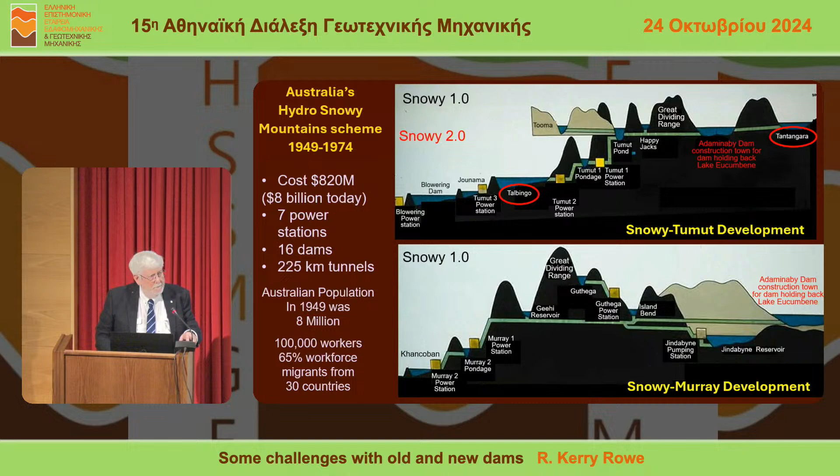A lot from Greece, from Italy, from Germany, from the countries that had just been occupied by Russia to become part of the USSR, and from the UK. I'm going to end the talk with Snowy 2, which involves these 2 dams.

Now, why is this particularly important to me? Because I grew up in the 1950s at the construction town where they were building Adaminaby Dam. I lived in this house. There's a picture of me when I'm about 5, a little older there. And as I said, I wanted to build dams from the first time I saw them being constructed.

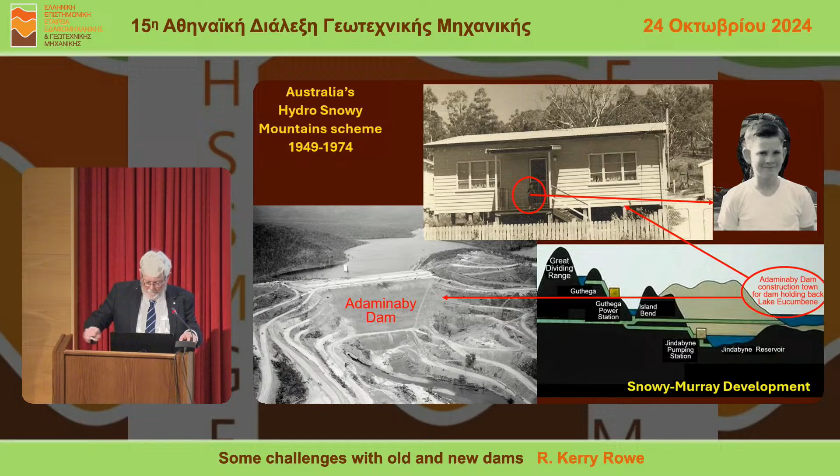So if you want to build dams, you become a civil engineer. So I studied civil engineering at the University of Sydney. I graduated in 1974, and guess what? The Snowy Scheme finished, and nobody wanted to build dams.

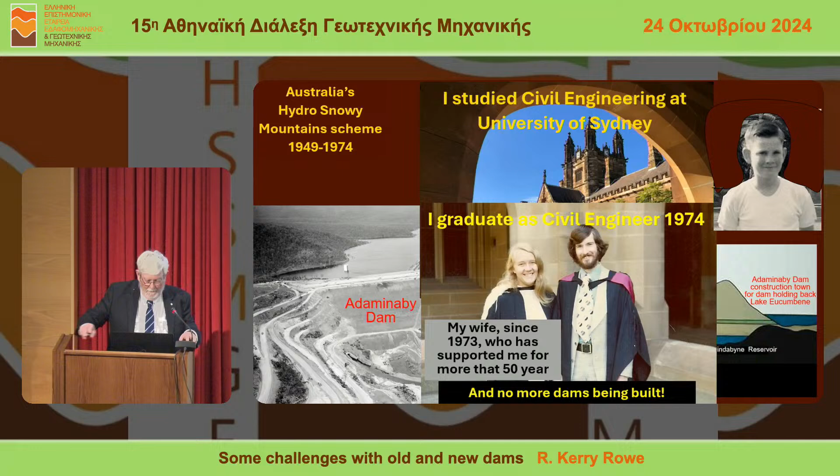Harry Poulos, who many of you will know, was my undergraduate thesis supervisor, and he persuaded me to do a PhD. And I studied many things in my PhD. I looked at soil structure interaction, anchors, piles and slopes. And in parallel, because I was working at the time, I worked on pile-socketed rock behaviour, driving piles into soft rock, rock mass modulus of weathered and jointed rock.

Then I moved to Canada and started working on tunnels and geotextile reinforcement. And you probably look at that list as I would have 30 years ago and said, what's the relevance to tunnelling? Well, I eventually found they're all relevant to tunnelling. And I'll show you a little bit of that.

50% of my work since 1980 has been containing fluids, with natural materials, with geosynthetic materials. And they can play a very important role.

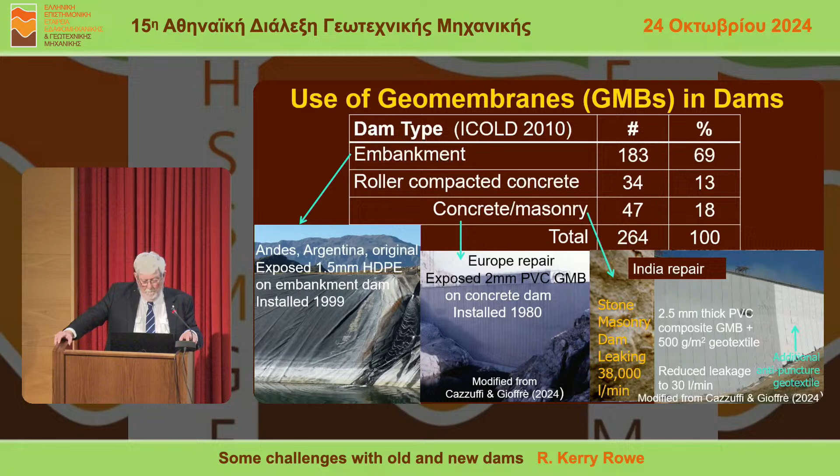They can be used in dams. A very dated ICOLD survey from 2010 listed 264 dams where they were used, the majority embankment dams, such as you see on the left. But geosynthetics are also extensively used in the rehabilitation of dams, such as the concrete dam you see in the middle and the masonry dam on the right.

Many different polymers have been used, but predominantly PVC, polyethylene, and bituminous. They can be left exposed or covered. The oldest exposed geomembrane is 50 years old, and the oldest covered is 64 years. So they do last.

So tonight, I'm going to talk about old and new dams, rehabilitation, and some of the roles geosynthetics can play. But we need to start with a little reflection on climate change, because it has a critical role to play in modern engineering of dams.

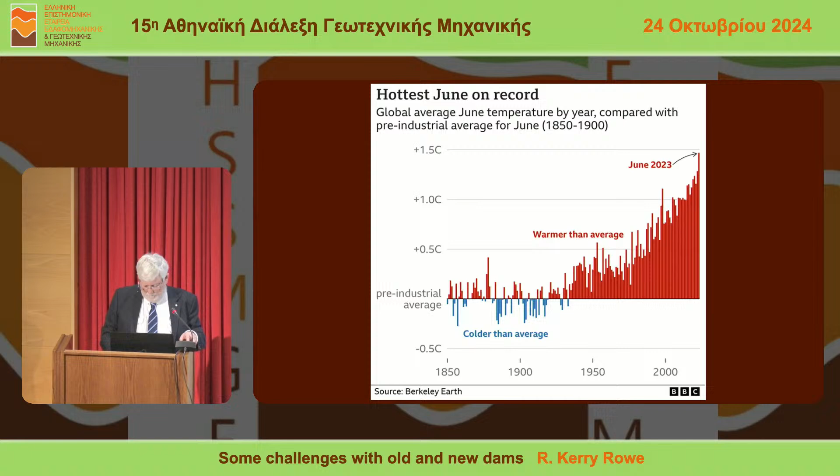I hope I don't have to convince you that climate change is real. Temperatures, on average, keep going up, and nowhere are they going up faster than in the Canadian Arctic. Inuvik is part of the land of the midnight sun, but it was at 33 degrees a summer ago. Norman Wells is in the Arctic, a lot of it on permafrost, and it was at 38 degrees last summer.

Now, why does that matter? Because what happens in the Arctic doesn't stay in the Arctic. All of that melting water has multiple effects, and one of the greatest effects is actually going to be on Western Europe.

Sea ice loss has many civil engineering implications. The rise in average temperature is what we talk about, but the really important thing is the increase in frequency of extreme events. Flooding of coastal communities is one example — it's only a couple of years ago that New York was flooded. Permafrost loss has a number of critical implications, not just for Canada and Russia where it's occurring, but for the rest of the world because of the methane that comes from that permafrost.

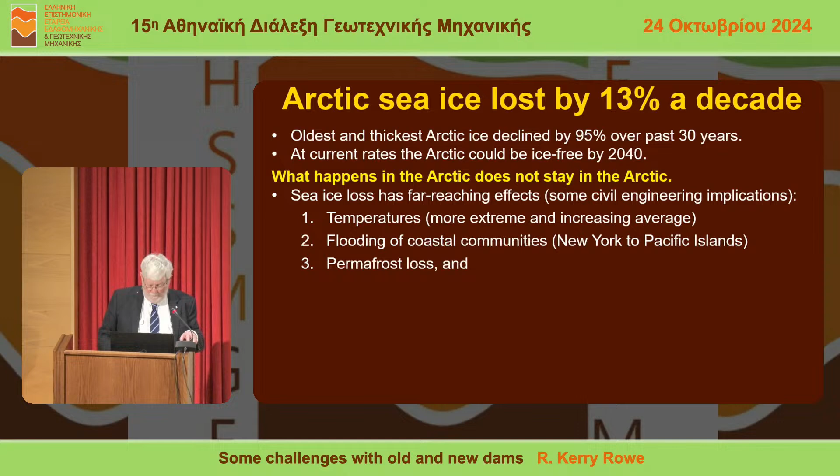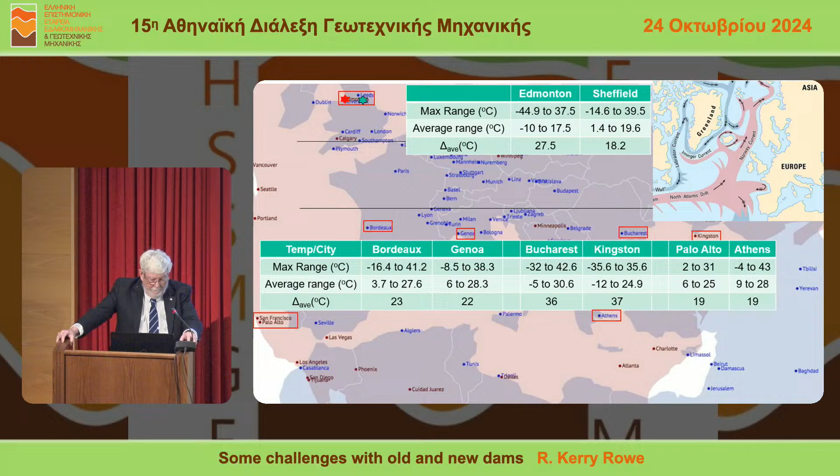Now, why does this matter? Because the melting of Arctic ice is slowing down the Gulf Stream, and it is now the slowest it's been in 1,600 years. The analysis is suggesting it's going to shut down — the only thing that's not known is whether it's in 1 or 2 decades or 1 or 2 centuries. Time will tell.

But climate change is not something to worry about in the future. It's here. March 2024 was the warmest March in 175-year history, and the 10th consecutive month of record high global temperatures.

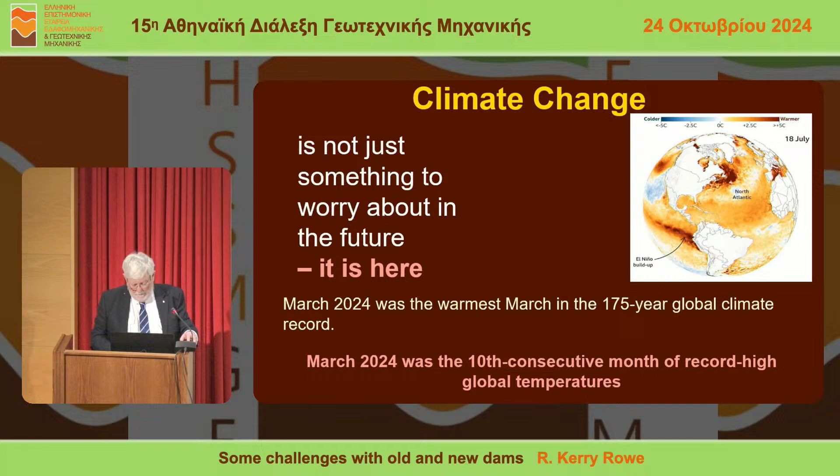And what are the implications? Well, I'm sure you're aware, because we'll get to Greece in a moment, of the storm that caused the failure of Libyan dams, with thousands of losses of life and tens of thousands of people displaced. People say, well, it's all because they didn't maintain their dams. That may be a factor, but lots of parts of the world are not maintaining their dams, not just Libya. And look at the destruction that it wreaked.

Now we come to Greece. As you are only too well aware, a couple of weeks later, you had major flooding effects. And in the context of dams, what we're worried about in particular is how these floods will affect dams, because if they fail, the consequences are, as you saw in Libya, huge.

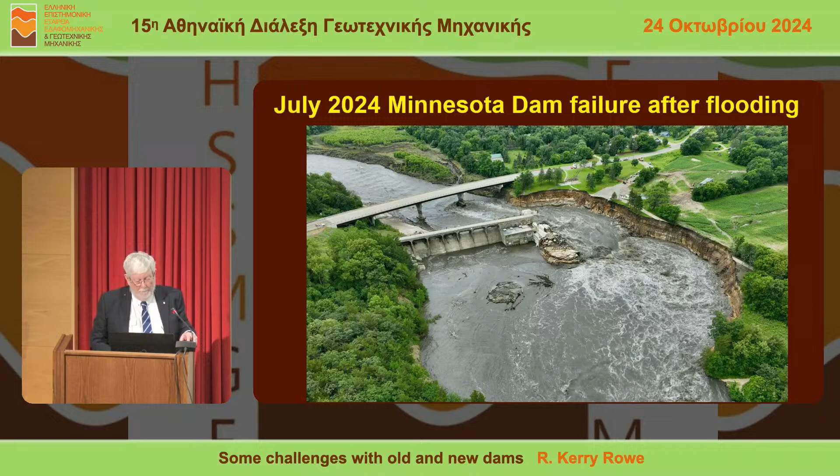So we need to mitigate the effects of climate change. The first step towards mitigation is anticipating what are the extreme storm events. The second step is identify locations of greatest risk of flood. And by risk, I mean probability and consequence.

Revise estimates of maximum probable floods. Reevaluate the safety of all dams in the context of the input design flood. And as needed, lower storage levels, raise dams, or increase emergency spillway capacity to accommodate the extra water that we now know is coming.

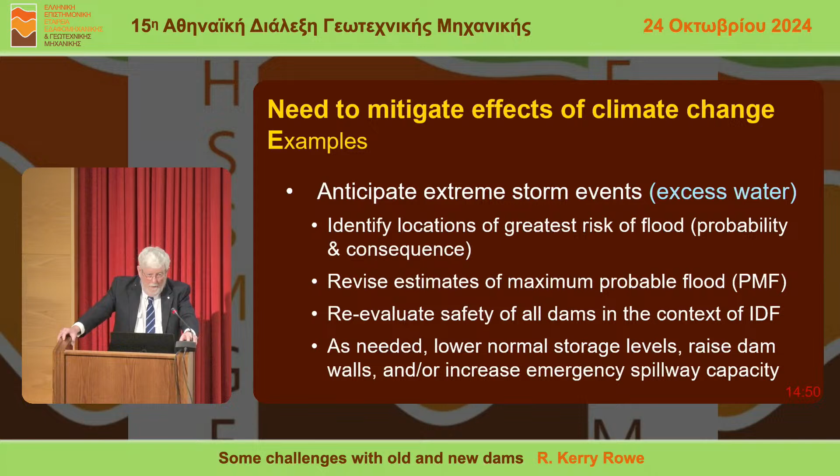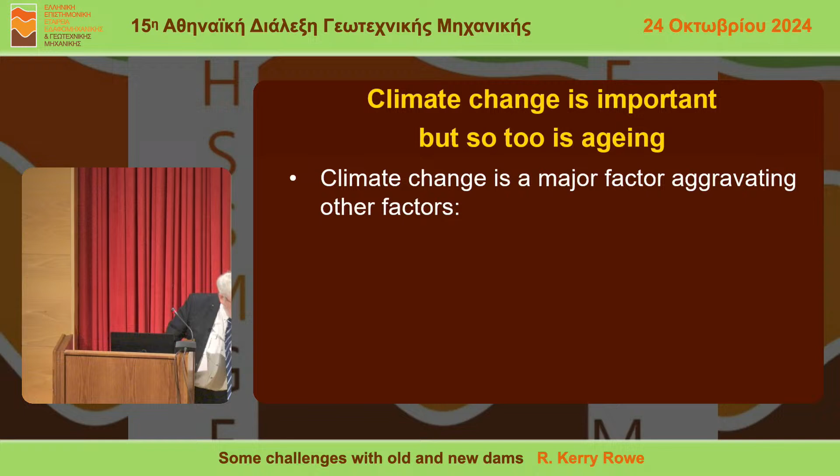So climate change is important, but it's only one of the factors that we need to consider. Other major factors are the aging of steel, the aging of concrete, alkali aggregate reaction, clogging of filters, erosion of sediment in cracks or fractures, and time-dependent loss of soil strength.

As I said, I'm a baby boomer. A huge amount of construction went on after World War II. And over the last 52 years, I'm not the only thing that's changed. Dams have been aging along with me, and that is becoming important. Just like humans, dams don't necessarily get better with aging. So we're going to now talk about rehabilitation, and then we'll talk about some new dams.

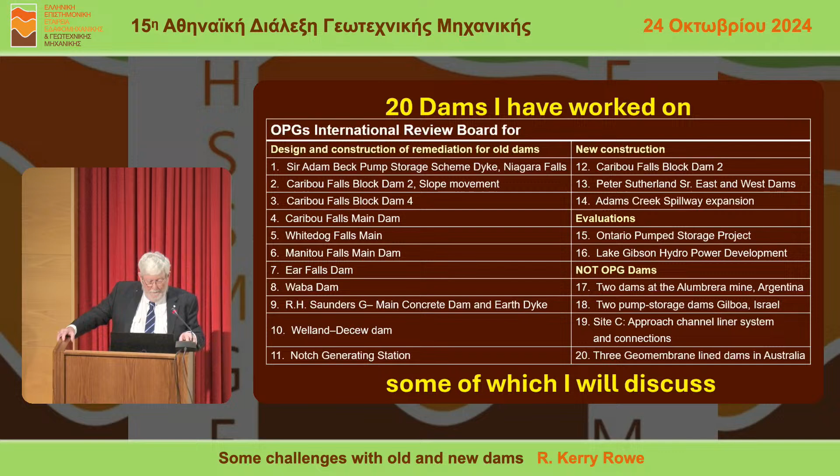Over the last 20 years, I've had the pleasure and privilege of working on 20 different dams, some of which I will discuss tonight. Now, the dams I'll be discussing in detail are predominantly from Ontario, and one I'll discuss in a lot of detail is from British Columbia. So I must thank Ontario Power Generation and BC Hydro for permission to talk about these cases.

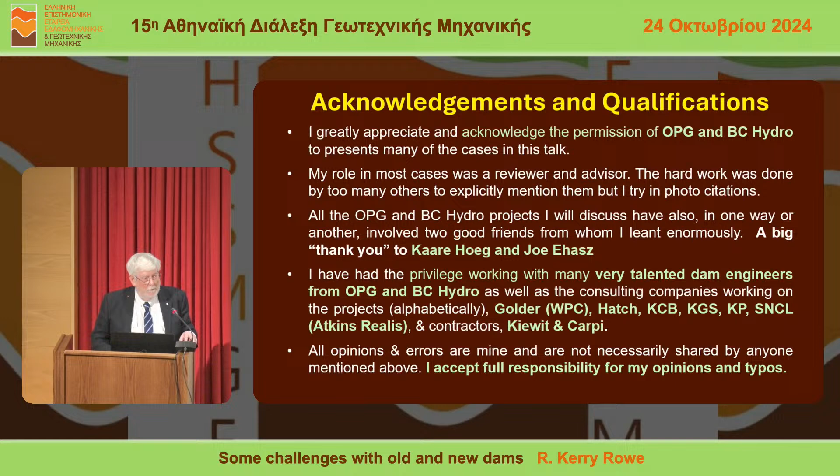My role has been as a reviewer and advisor. Other people are doing all the hard work. And for the last 15 years, I've had the great pleasure of working with two giants in dam engineering, Kaare Hoeg and Joe Ehasz, from whom I've learnt a great deal. And the privilege of working with many talented dam engineers with OPG, BC Hydro, and various consultants and a number of excellent contractors that I've had the privilege of working with. Having said all that, none of them are responsible for what I'm saying, except for me.

So Ontario Power Generation has 66 hydroelectric stations, 240 dams on 24 river systems, and generates 42% of Ontario's power from hydro, out of a total of about 18.2 gigawatts. BC Hydro has 31 hydro stations and generates 12.2 gigawatts. So clearly, dams are important for hydro.

Why else are they important? Well, water supply. Flood control is a major consideration. And when you build a nice reservoir, it's lovely to have it for recreation. These are all great motives for building it. But they also induce great challenges as we try to deal with climate change and the increased severity of storm events.

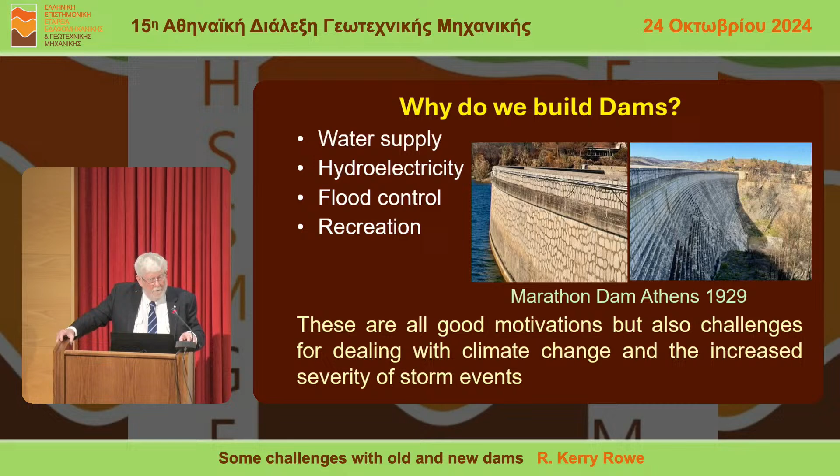So what can we do if the input design flood goes up because of extreme events? Well, we could reduce operating water levels, but as you can see, that has very significant implications. Rarely is that an option. We can increase the dam height. That also has social and political effects. We can increase spillway capacity. And now we have to think very carefully about what is the risk of flooding as we increase the amount of water in a storm.

So dams are a technical issue, but they're also political and social issues. And the engineer is often caught between the proverbial rock and hard place. But tonight, we're going to focus on the technical issues.

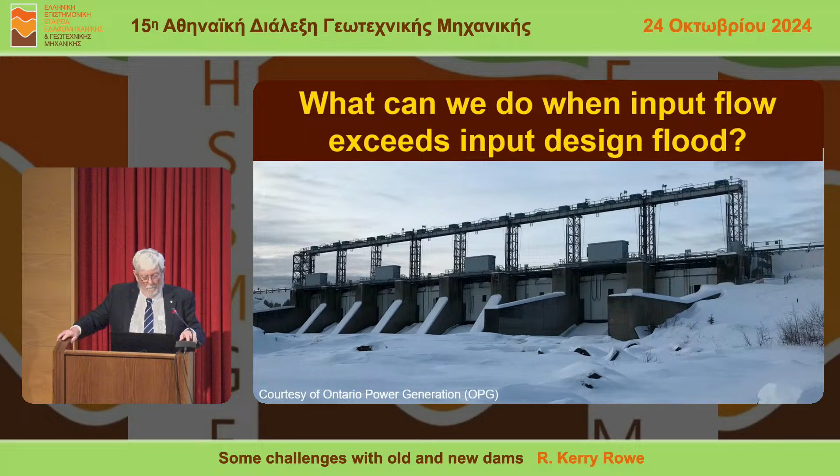So let's begin with the simplest case when you can do it, and that is increase spillway capacity. So, what can we do when the input flood here exceeds the input design flood? Increase the capacity, and in this case, the flood risks were low.

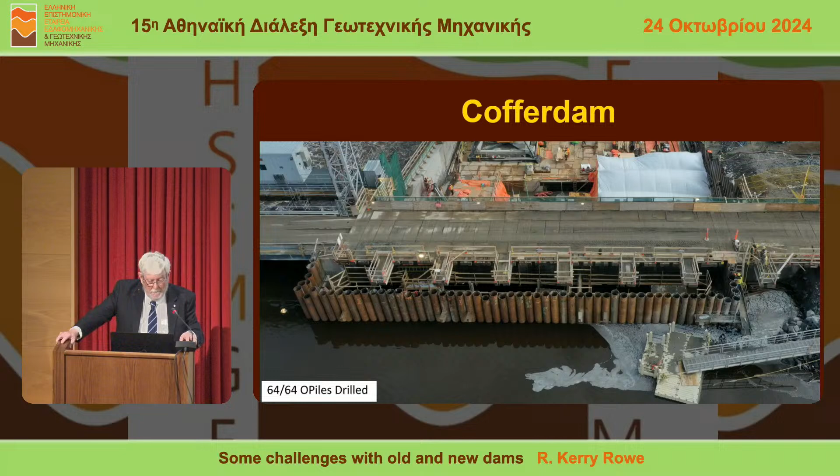So, the capacity is going to be essentially increased by more than 50% by adding 4 new gates. Now, a lot of that is structural work, not of particular interest to the geotechnical side of the profession on which I sit, but there are some very interesting geotechnical issues with respect to, firstly, the cofferdam, but especially the upstream dam wall that was required to get the extra spillway capacity, because it's quite a complicated flow problem.

So here you can see a cross-section along the path of the upstream wall, showing the overburden and the bedrock. And this is the layout of the wall. You can see the drilled piles or caissons and the sheet pile walling between them.

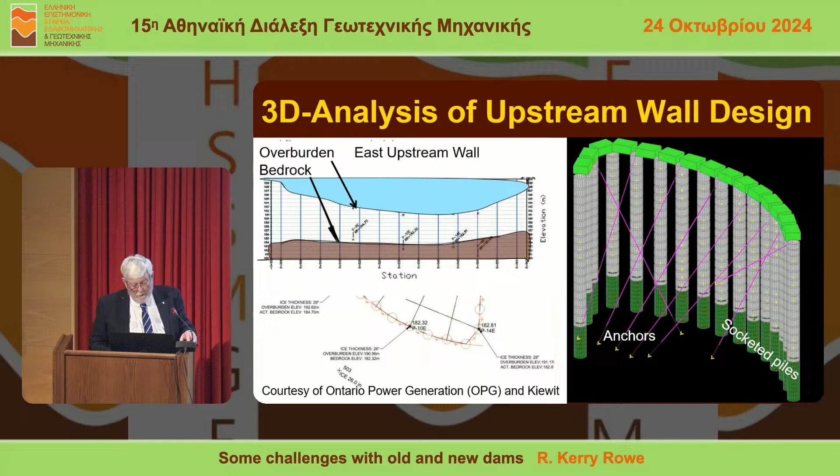And this is what it looks like as a schematic that was prepared as part of a detailed 3-dimensional stress analysis to ensure that the system would be safe. We have socketed piles, we have anchors, and we have an interesting construction process.

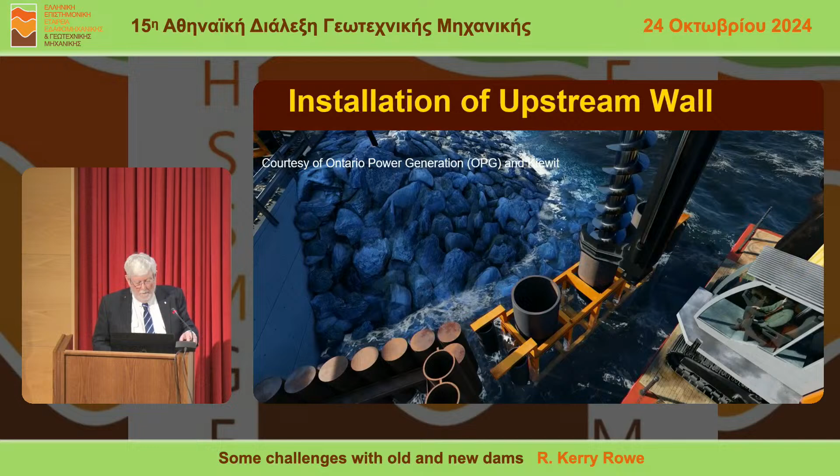So here is the clearing up of the riprap where we need to place the piles. There are the forms that make sure that the piles are positioned correctly, starting at the cofferdam. The process of drilling out the soil, drilling out the rock, taking it away on a barge, filling it with steel and then concrete as the wall develops.

And here we see it finished. A fascinating project. Let's move to another one.

This is more geotechnical. Accommodating 1.5 metres of crest settlement. So this is a dam built on highly sensitive clay. We call it Leda clay. It was built 60 years ago.

And the engineers who built it were very good. And they made predictions of the settlement, and they predicted by this time it would settle 1.5 metres. And it has. They're really good.

Two other things complicate life, though. The first is pore pressures. When you see 1.5 metres settlement, you know there's been pore pressure dissipation. But the excess pore pressures after 60 years are still 1 metre above the crest. That is because this clay collapses, it destructures, and it generates pore pressures as quickly as they dissipate.

The second thing that couldn't have been anticipated 60 years ago is climate change and the effect that has on the input design flood, plus run-up, plus set-up. So that the core in 2018 was just 0.9 metres below the current IDF plus run-up and set-up. So what do you do?

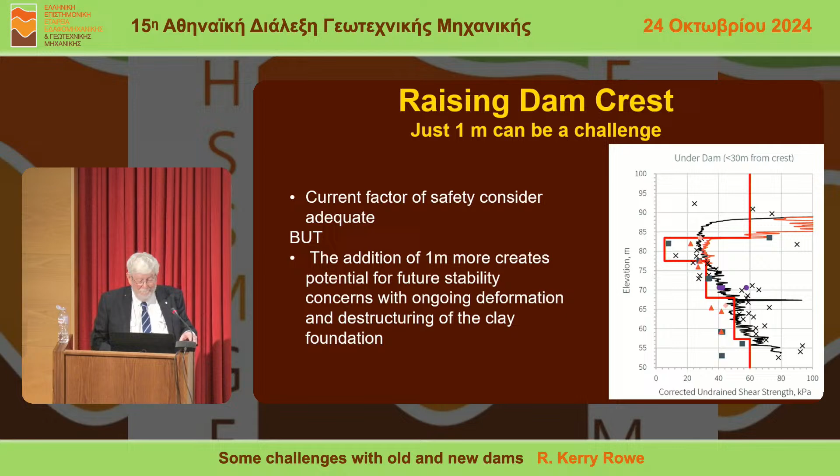And in fact, it is one that says, no more adding 1 metre. So what can we do? Well, in this case, it turned out to be a relatively simple solution that you can't always use, but was rather fortunate given the other challenges.

Because when you look at the 2018 IDF, it is about 0.74 metres below the crest. When you add the run-up, you are very close, as I pointed out, to the core crest. But with the Jersey barrier, one is able to accommodate just the current IDF run-up and set-up. So it deals with the wind and wave action.

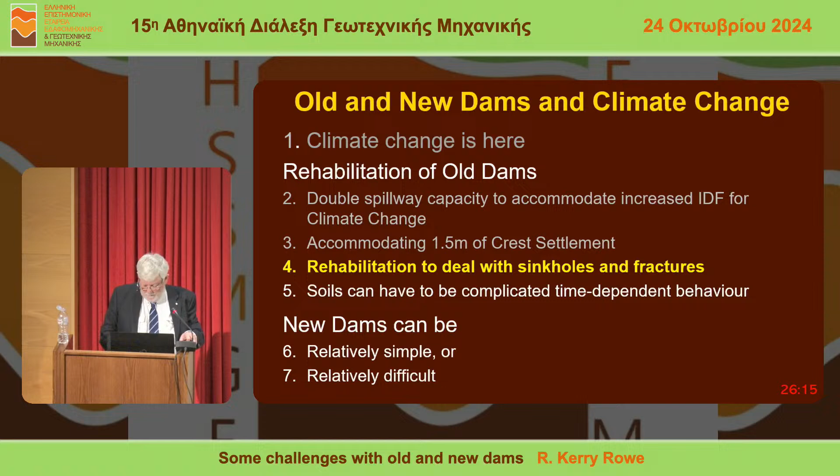So that is the next example that I have. The third example is rehabilitation of a dam built on limestone. And this is a particularly sensitive dam. It's the Sir Adam Beck Dam built in 1957.

It's on a mesa right next to Niagara Falls. And as you know, Niagara Falls lies between the United States and Canada. And this dam, as you can see in the diagram, has 2 generating stations and is located with a 20-metre high dam wall about 200 metres from the main crossing between Canada and the United States.

So if something happens to that dam, billions and billions of dollars of trade have been wiped away, not to mention the lives of people living downstream. So needless to say, OPG take it very seriously.

Now let's have a look at its size. It's 300 hectares inside the dike, a 7-kilometre long dike. It's a pumped storage scheme, the only one we have in Ontario, where you pump water in when you've got excess energy and you drain it out when you need that energy.

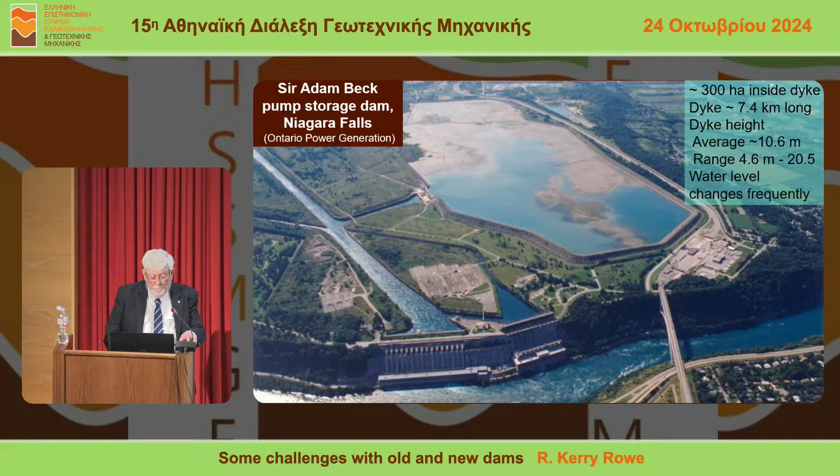And the water levels go up and down quite frequently. It has the advantage it's easy to drain. Now this is the dike. It's fairly traditional. We've got a base filter, sluiced rock fill, coarse filter, fine filter, compacted core, and then going out outer filters, rock fill and riprap. And everything was very nice for a short while.

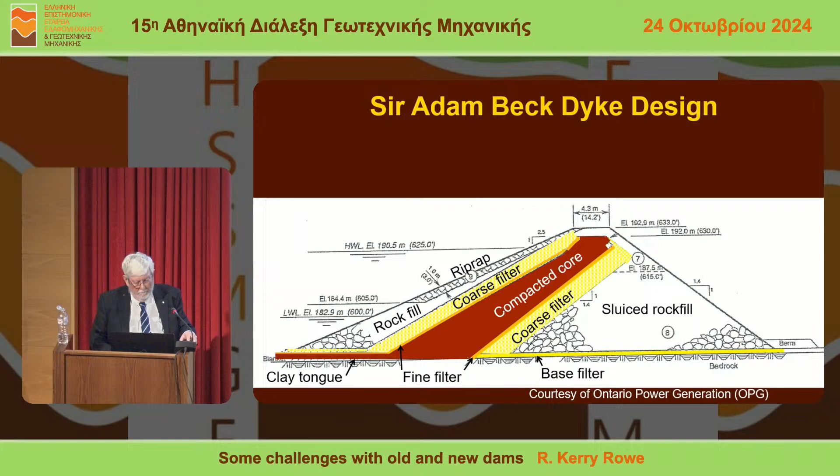It's on limestone, fractured limestone, high above the Niagara River. And one year after construction, there was a failure. Luckily, it was caught in time, not to be a severe failure, but nevertheless. Piping occurred through the overburden, through the fractures in the Lockport Formation, which is fractured limestone, and up into the zone outside the dam core. So this was fixed by grouting the affected area and by construction of a clay banking.

So it's 1958. I'm still at Adaminaby Dam, still going to middle school.

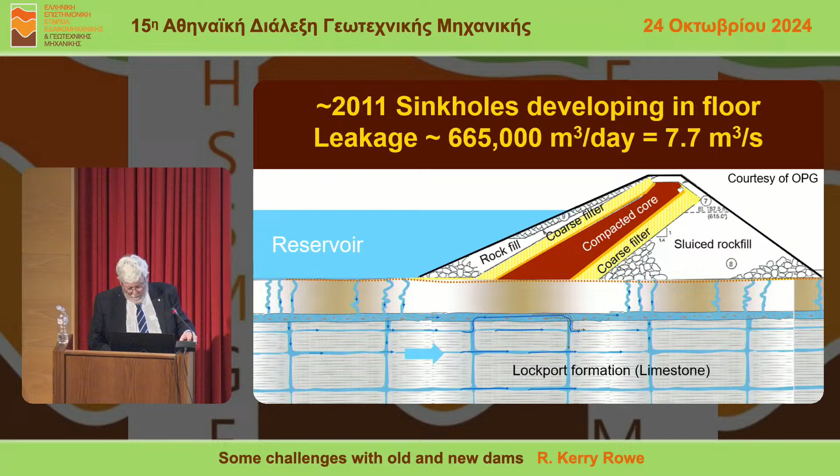Now we come to 2011, and we have sinkholes developing. Sinkholes, when you have limestone, is a warning sign. We have leakage of 665,000 cubic metres per day, or about 7.7 cubic metres per second. Because water is going down, it's migrating.

So how do we fix this? Well, the first thing we could do is do grouting. Done it before, do it again, but it has obviously imperfections. So the grout curtain went in, but also there was a big debate: do we need to line the entire facility or just a portion of it? Ultimately the decision was made to do a portion.

So we want to tie into the clay tongue, and we used geosynthetic clay liners to tie in to the clay, and HDPE as the lowest permeability component. A GCL is, for those not familiar with it, a layer of bentonite sandwiched between two geotextiles. Bentonite is a swelling clay and can have, under the right circumstances, very low hydraulic conductivity. And so we're going to use this to tie in to that clay tongue that you can see on the left-hand side of the figure.

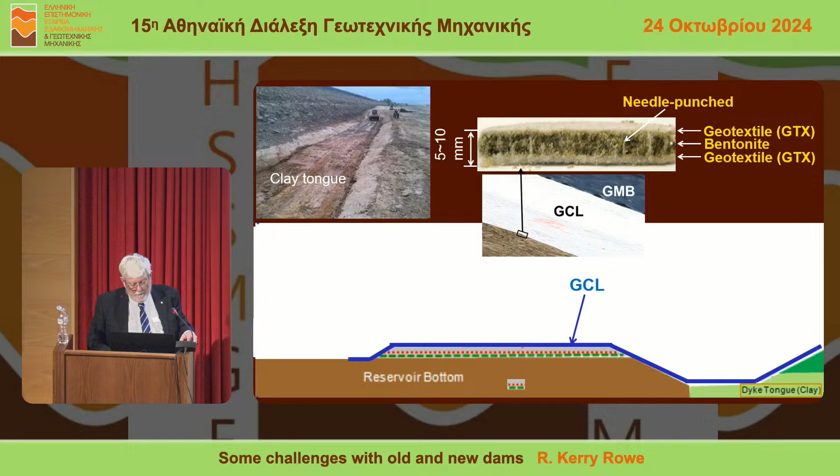And at the bottom of the figure, you can see the dike tongue coming out. You can see schematically we've excavated down to the dike tongue, and you can see it actually in the left-hand side of the figure. Then we place a GCL down, a geomembrane, another GCL, and gravel to bring it back up to an operating level.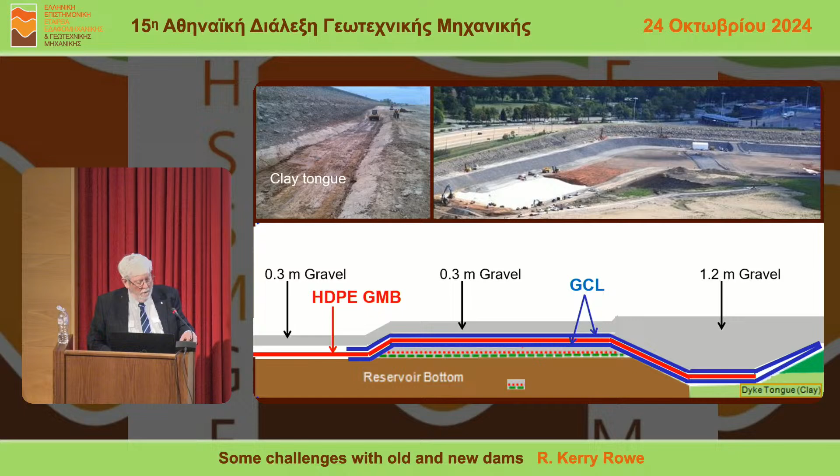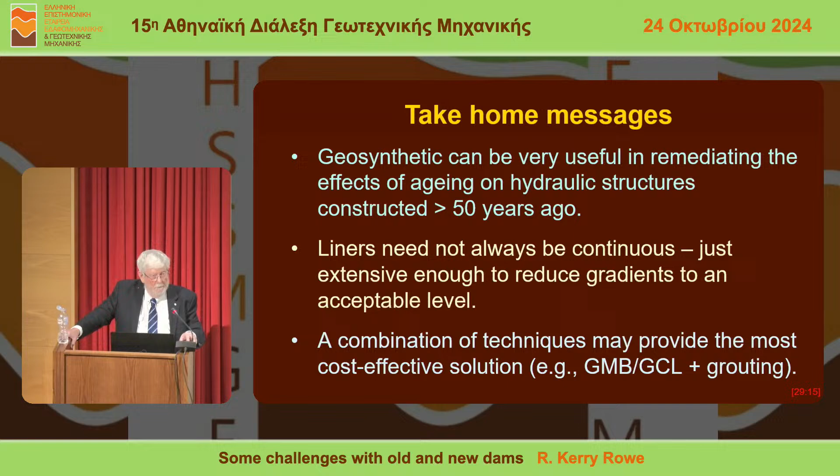So here, the geosynthetic can be very useful in remediating the effects of aging on a hydraulic structure that was constructed more than 50 years ago. Liners don't always have to be continuous, just extensive enough to reduce the gradients to an acceptable level. And a combination of techniques often provides the most cost-effective solution. This was partially geomembrane, GCL and grouting.

So let me now move to my final remediation, and it illustrates the complexity of soil mechanics. So another dam constructed in 1957. I did mention there were a lot of dams built around that time. And at age 57, it had, shall we call it, its own version of heart failure, because we had a slide into the reservoir.

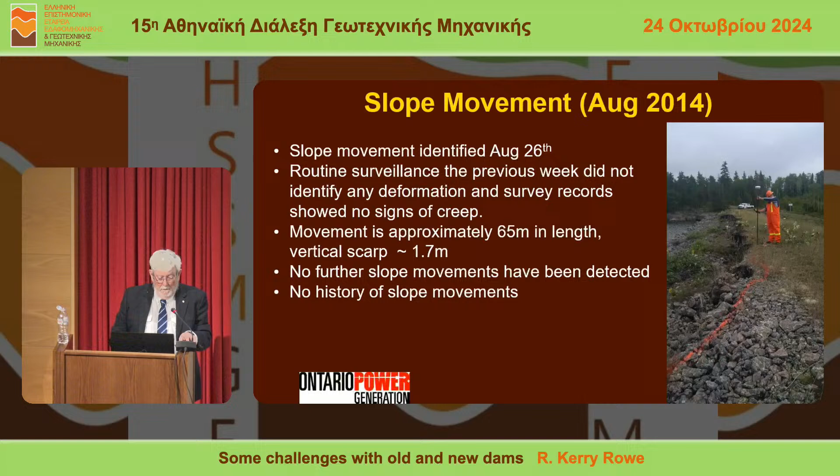So the slope movement was identified on the 26th of August, 2014. It is carefully surveilled, and there was no sign of it the previous week before the failure. No deformations, no signs of creep, and yet, on that particular day, over a length of 65 metres, it dropped 1.7 metres. No further slope movements were detected. No history of slope movements. But a big red flag.

Now the big question is, why did this happen? A university was hired and a couple of PhD students went away to try and solve the problem. And didn't quite solve it. Now I don't blame them, it's a very complicated problem. Lacustrine clay of high plasticity, smectite rich, expansive, strain softening, cemented by gypsum, and sensitive to the pore fluid, and fissured. Well, yes, life can be more complicated than that, but not often.

For those of you who are devotees of soil mechanics, here are some of the properties. I'm not going to bore you by going through them, but to point out that there is a very significant difference between the peak and the residual strength. And the operating strength was ultimately back-figured to be in between.

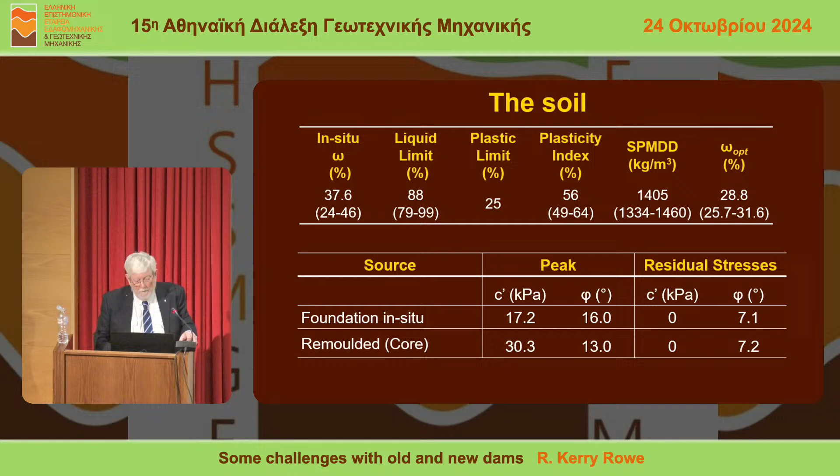So we're going to look at some results at two sections: section 2, where there was no failure, and section 3, where there was a failure, looking for signs or clues as to why it failed where it did.

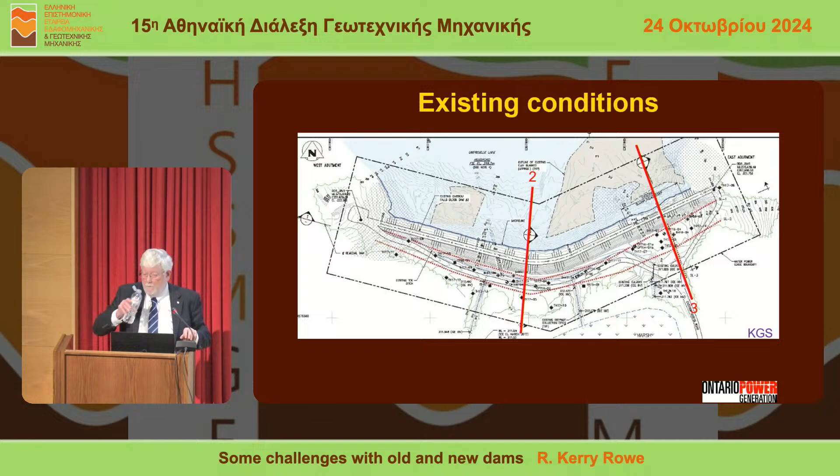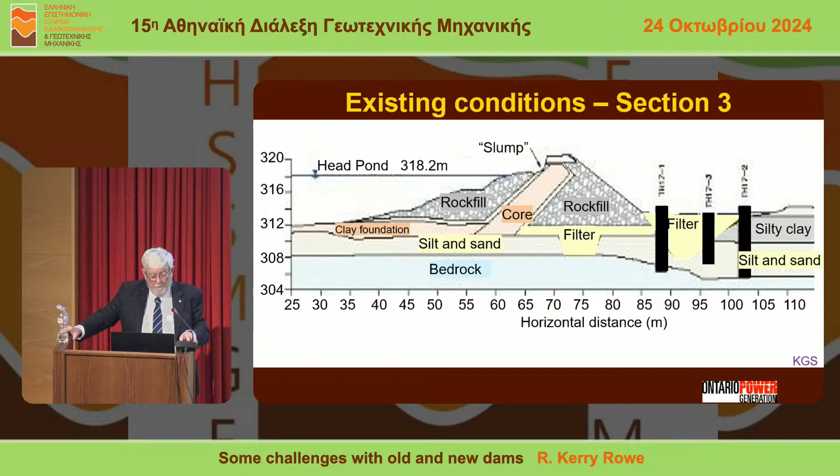And here's the section that fails. So what's the difference? Well, if you look at that, from most perspectives, you'd say this would be more stable. But it wasn't. So, in the end, what do you do?

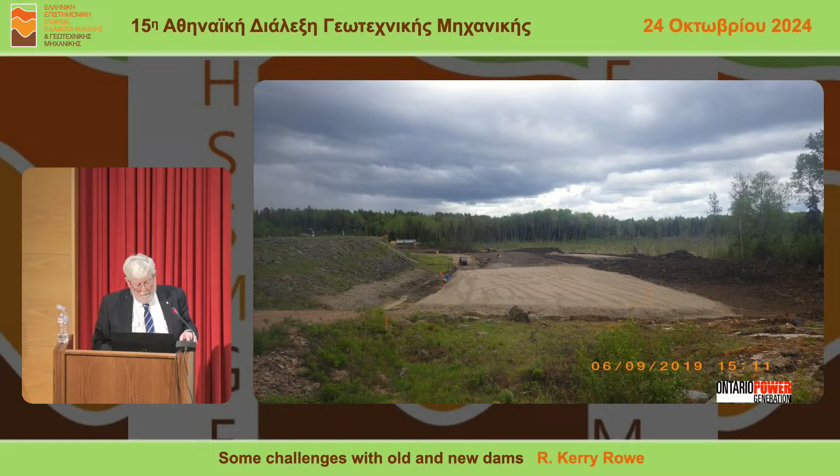And here is the old dam. Here is the start of the construction of the new dam as it evolves. This is preparing the material that will be adjacent to, on either side of, the cement bentonite wall. It involved excavation down into the rock, and excavation of the soil that had been placed, to replace it with a cement bentonite slurry.

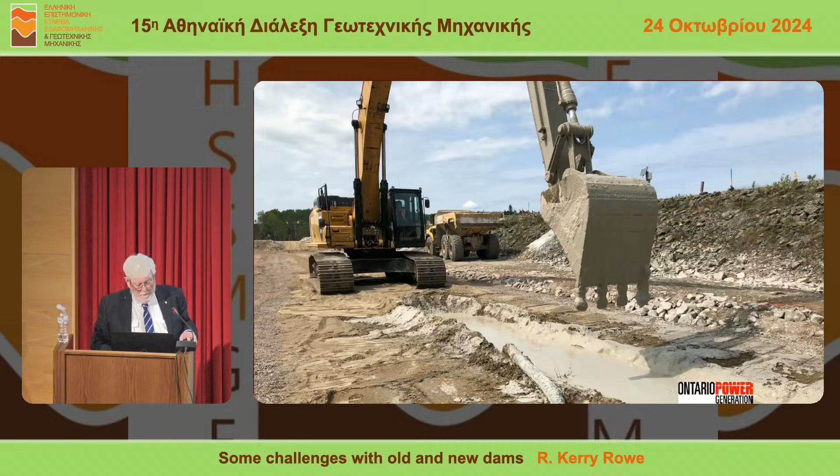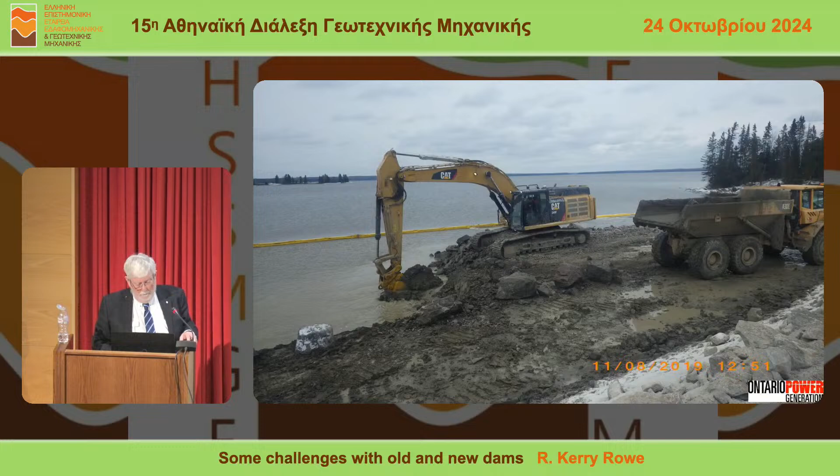And here you see the process in action, and the finished structure. Now the old dam is removed from above the low water line. And here is the total finished structure.

Now, why that was particularly important, as I mentioned before, is not just for its own sake, but for many other dams that had been built with the same material at the same time. So, of course, what you would do is analyze those dams with the strength that was mobilized at the one that failed.

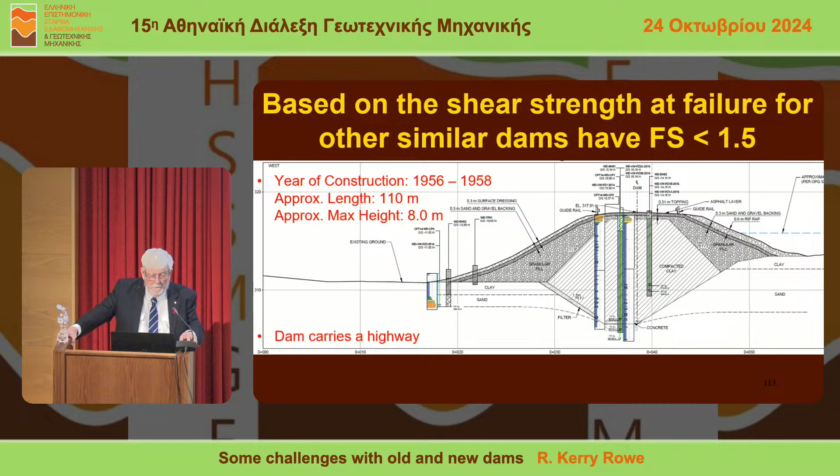And what you find is that in many cases, the factor of safety was too low. Here's one example where the calculated factor of safety was just below 0.9. Now, you could say, well, it should have failed. It hasn't yet. But if you went back to 2010, you'd say that other dam hadn't failed either, and then it did. So it's not very comfortable sitting with a factor of safety of 0.9 when you know the consequences of a failure could be huge.

So what did OPG do? Obviously, got consultants to design and then contractors to install remedial measures. In this dam here, the downstream berm brings the factor of safety up to 1.5. Here's another example: factor of safety of 1. Well, it's better than 0.9.

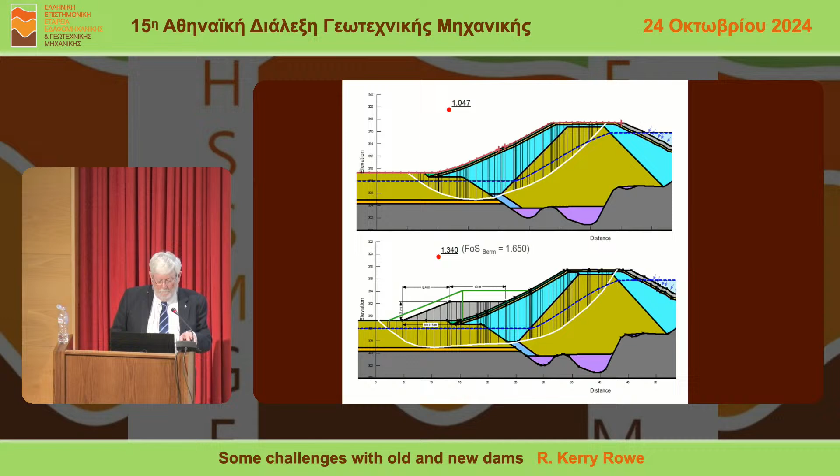Firstly, it was raised to 1.3, and others were raised to 1.3 and then went back and raised it to above 1.5 — this one at 1.65. So this is a case showing the potential challenges that come with time with a dam that sat there happily, getting tired, or more to the point, the soil below it getting tired.

Let's now go to some new dams to finish off our talk, and we're going to start simple. It's always good to start simple. This is a small dam, Sir Peter Sutherland Sr., located in eastern Ontario, a collaborative project with the local First Nations community. We have the creek called the New Post Creek, which will be dammed with an east dam, a west dam, and a spillway.

We have an intake channel, 320 metres long, 8.5 metres deep, which will be lined with a high-density polyethylene geomembrane. We have a generating station, rather small, 28 megawatts. The overall cost was about 7.2 million euros per megawatt.

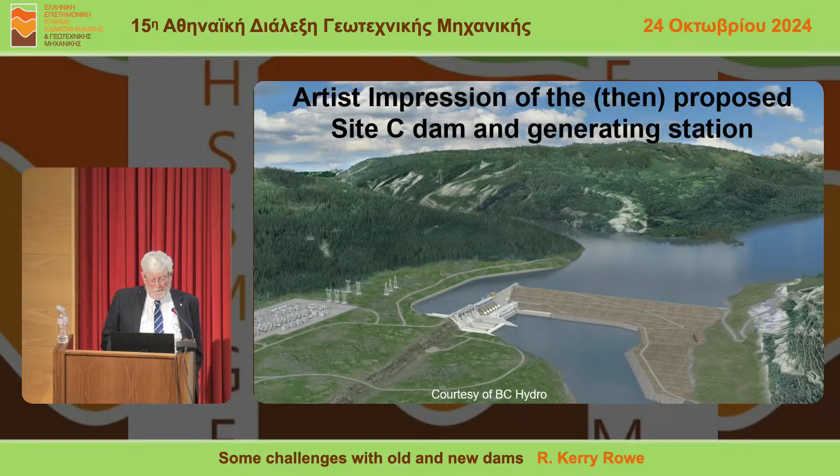Now that was a simple one. And we've got quite a lot of time left, so you can anticipate the next one's not so simple. So this is Site C. It is a dam in British Columbia. This is an artist's impression of what it will look like.

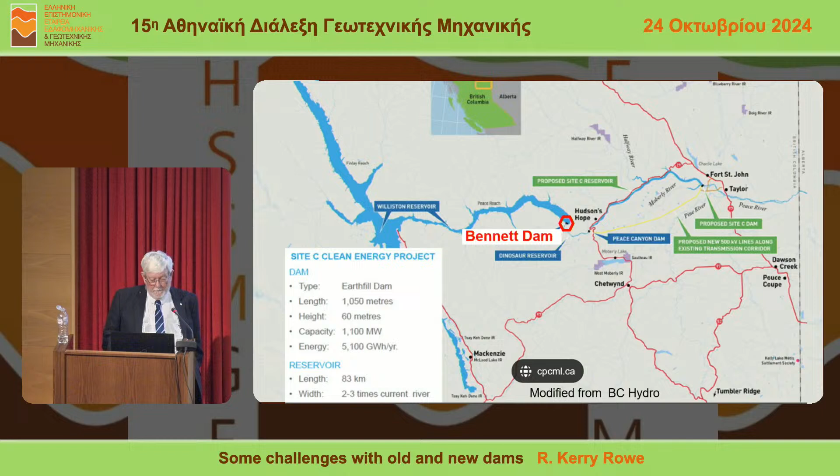And it is the third dam on the Peace River. The first is the Bennett Dam, quite famous. Second is the Peace Canyon Dam. And the third is Site C. It's an earth dam, about 1 kilometre long, 60 metres high. The generating capacity is about 1.1 gigawatt, and the overall energy is 5,100 gigawatt hours per year.

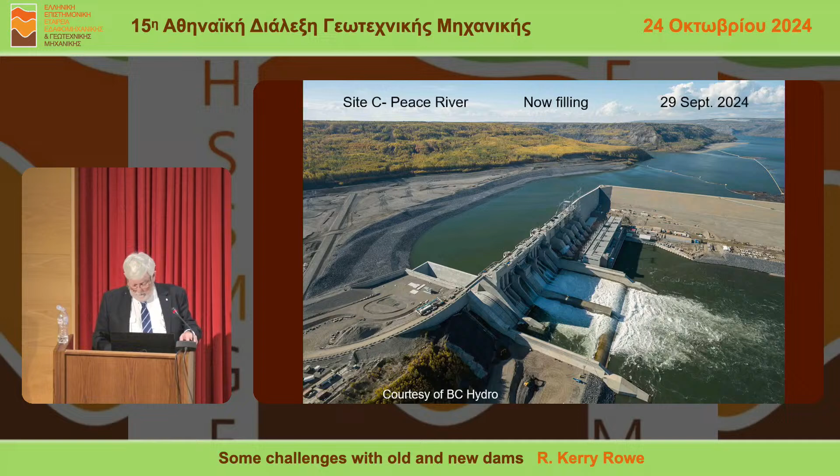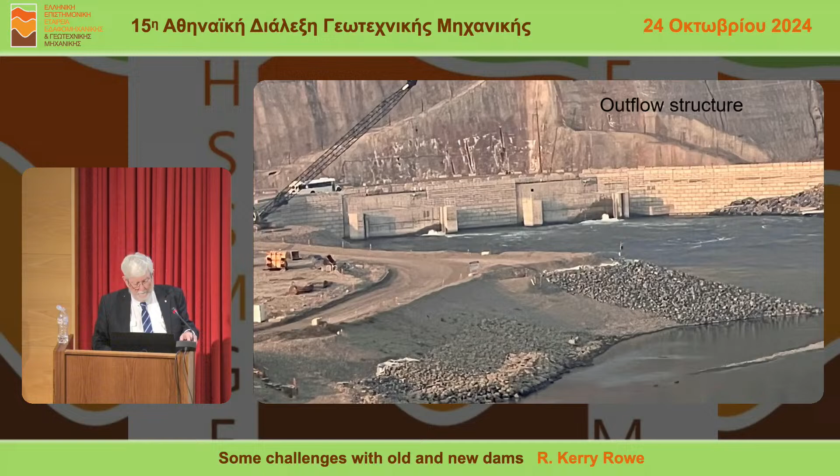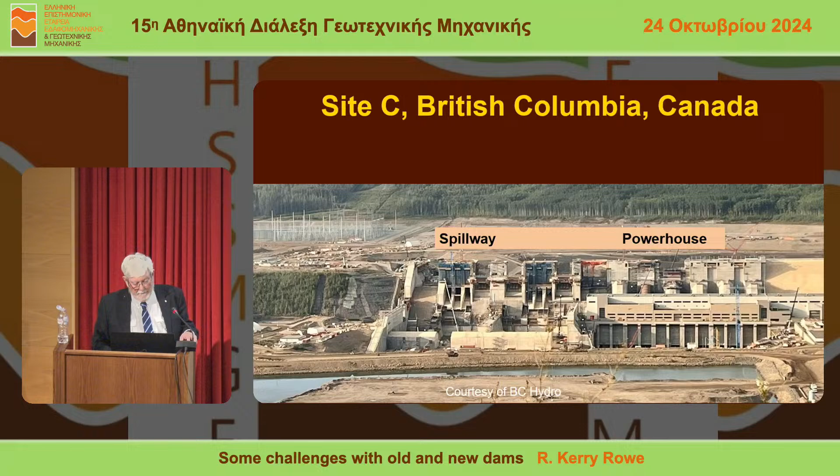Then there's the earth dam itself. Fairly traditional, compacted, low permeability core, filters, rock. Here we have the spillway structure, roller compacted concrete, and the generating station, also roller compacted concrete. And here's the lined approach channel, where we'll be focusing a lot of our attention.

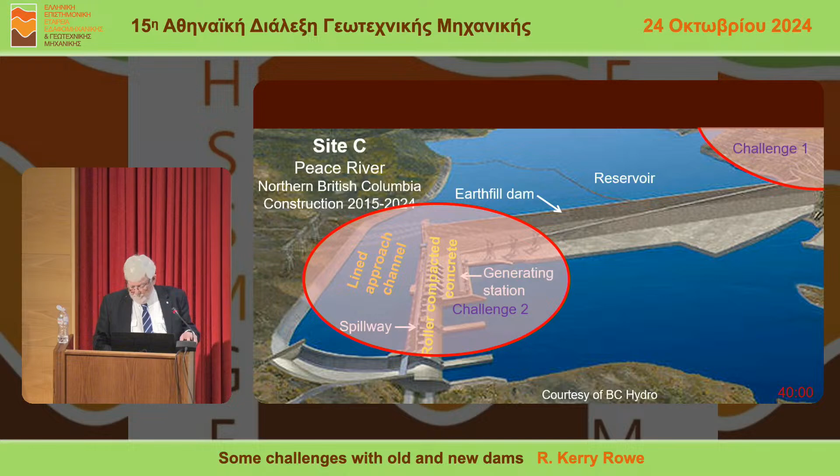Now, there were two areas of challenge on this program. Challenge one on the north side, on the left bank. Challenge two on the south side, or the right bank. Now, a newspaper article in July 2016, and this newspaper wasn't especially friendly to the project, stated, key geotechnical surprises to date include unexpected shearing during construction, unexpected slope failure on the project's north bank, a larger than expected deterioration of the shale bedrock exposed during construction, and a phenomenon called rock rebound swell.

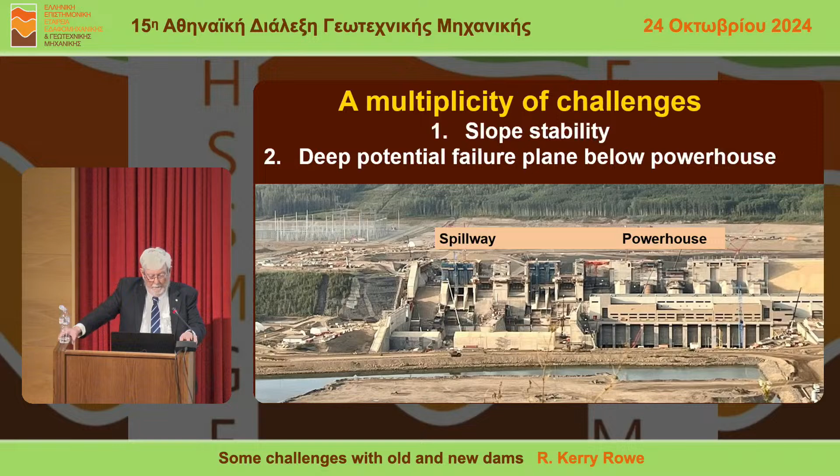So there was a bedding plane known to be weak, and the initial plan that was being implemented was to put a shear key across that bedding plane. There's a thick concrete buttress you can see there. The key's going down 35 metres. And all was good until small movements were detected on a second bedding plane below the shear key.

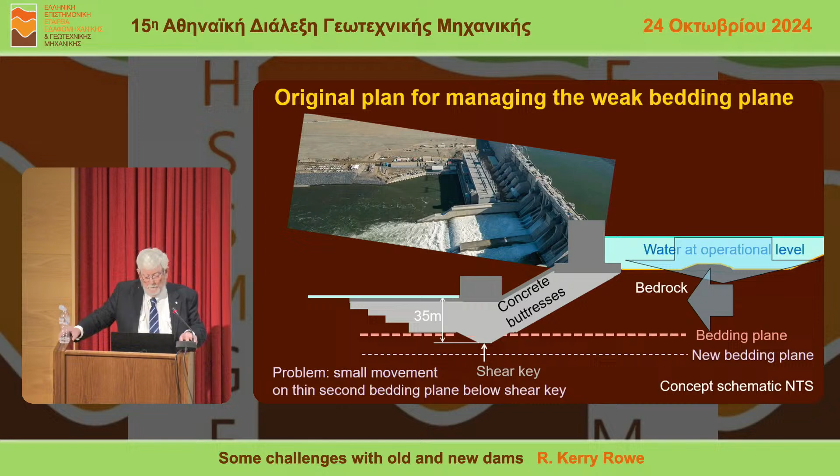So, there are three issues that I just dwelt upon. One, the bedding plane. Two, the rock that doesn't like water. And three, rebound. And there was a two-part solution to these three problems. First, anchor the buttresses deeper into rock. Second, install 96 piles, each around 2.5 metres in diameter. That's fairly hefty. 37 millimetre thick steel filled with concrete, 50 to 60 metres long. Grouting of the bedrock beneath a plinth, and a sophisticated liner system to keep water away from the rock.

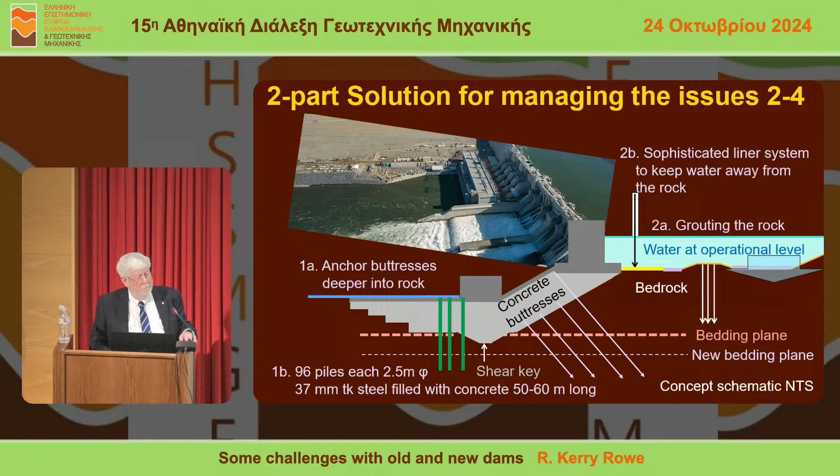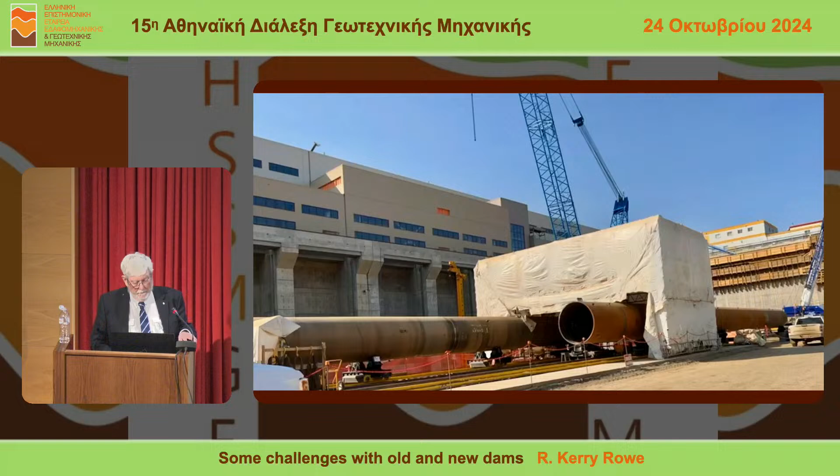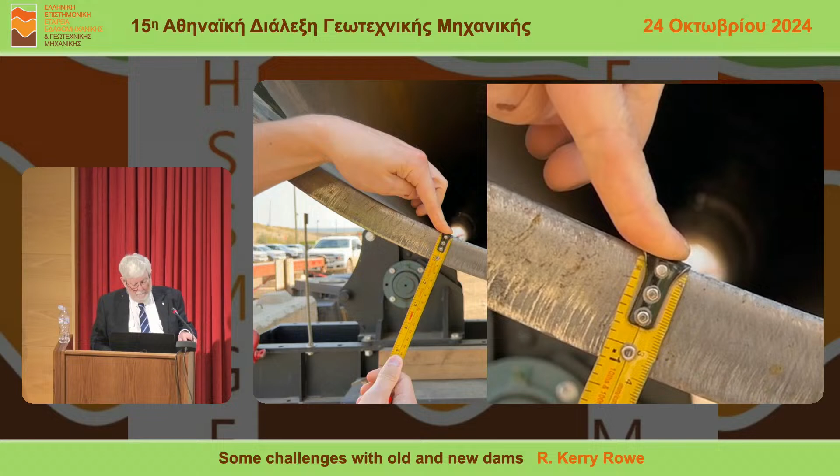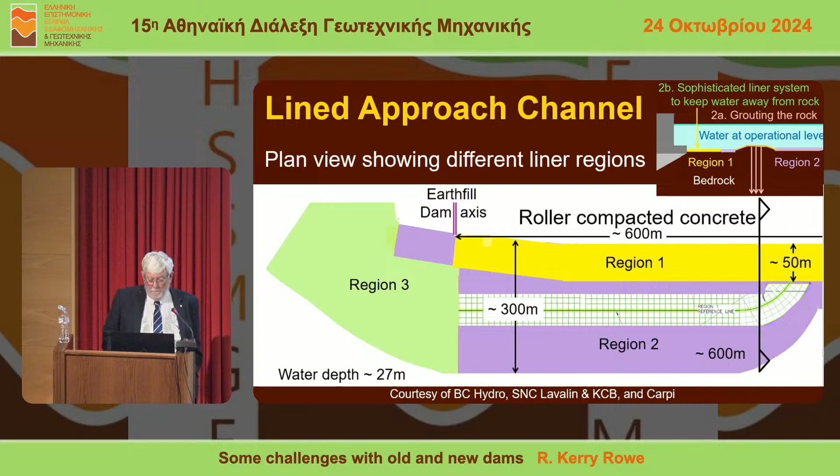Here is the roller compacted concrete, and our liner system has 3 regions: Region 1, Region 2, Region 3. Here is a cross-section, and you can see that Region 1 extends about 50 metres from the concrete, the most critical zone. Then we have Region 2, and then in the least critical zone, Region 3, each with a somewhat different liner system. So let's start with the simplest one, Region 3, about 4.3 hectares.

One of the design considerations is minimal erosion, so there's rock fill, cobbles and gravel to provide that. I will not dwell on that in other cross-sections. Minimal leakage - so how do we get minimal leakage? A geosynthetic clay liner.

Now we need to protect the clay liner from gravel, so we have 0.3 metre of sand protection layer. When the dam is full, it'll have somewhere around 27 metres of water above this location, and the GCL is probably going to be about 7 millimetres thick, 0.7 of a centimetre. So you can appreciate that we're dealing with a very large gradient of the order of 4,000. And a large gradient like that can induce internal erosion of the bentonite.

So an important consideration is preventing internal erosion. So we have a 0.3 metre compacted till layer here, 25 to 65% fines. And although it has a not insignificant hydraulic conductivity, that's not why it's there. It's there to prevent internal erosion of the GCL.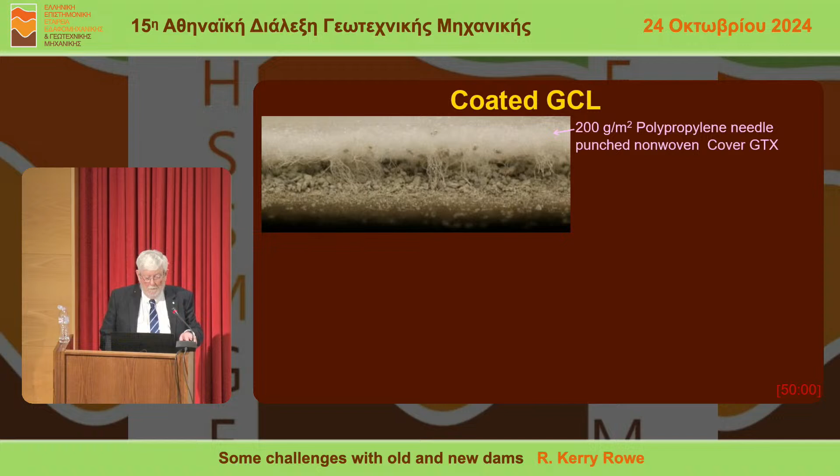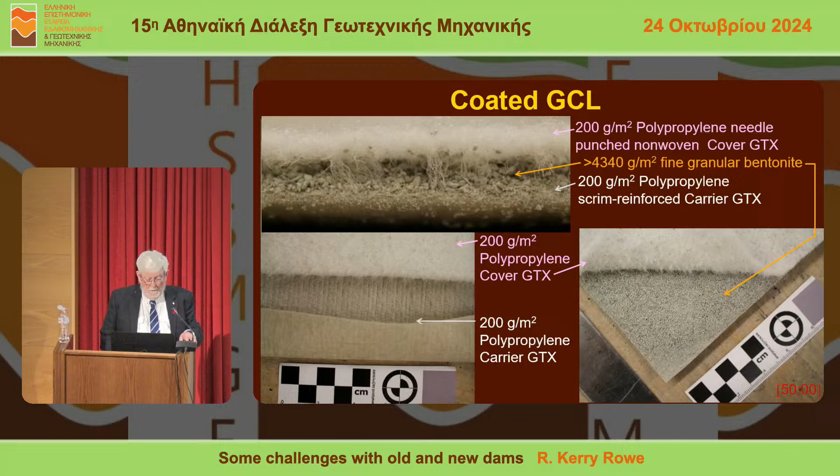And here's the GCL. You can see the cover geotextile. You can see the bentonite on the right. It's been removed on the left. You can see the carrier geotextile with its 300-gram coating. And that is Region 3.

Region 2 looks much the same so far. It has a GCL, same story. Geomembrane, though, has been added. So now we want even less water to get through - 3.5mm thick PVC. Sand protection layer, but also now a 2,000-gram geotextile. And because we want to find holes in the PVC, we have a thin conductive sheet. And we've got the compacted till and the coating for the same reasons as before.

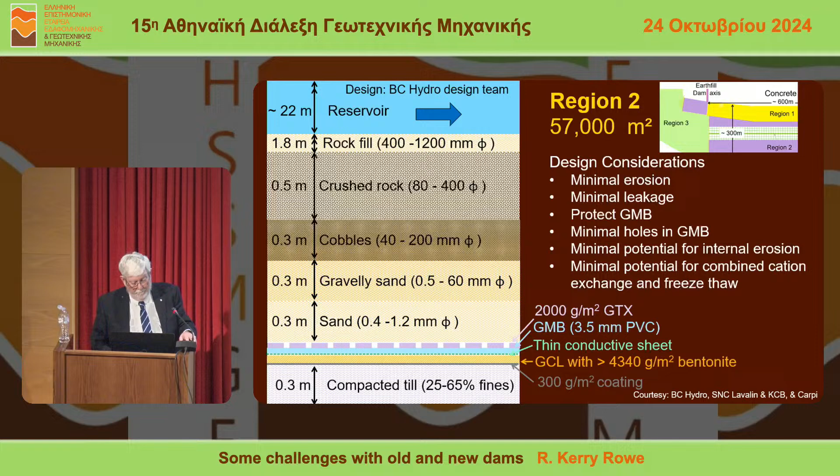Now let's move to Region 1. 2.5 hectares, but wow, what a 2.5 hectares of liner. Here we have gravelly sand, and liner type 1, which is going to need a whole slide to itself. 100mm mud slab, 300mm of concrete aggregate, and another mud slab with drainage from that layer.

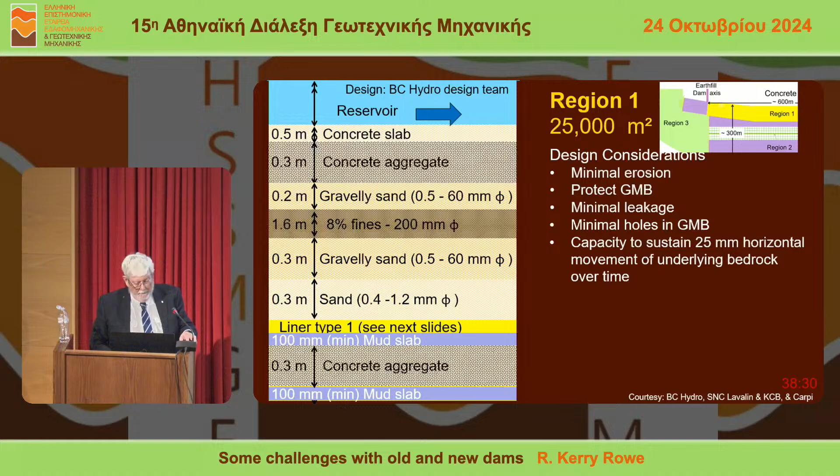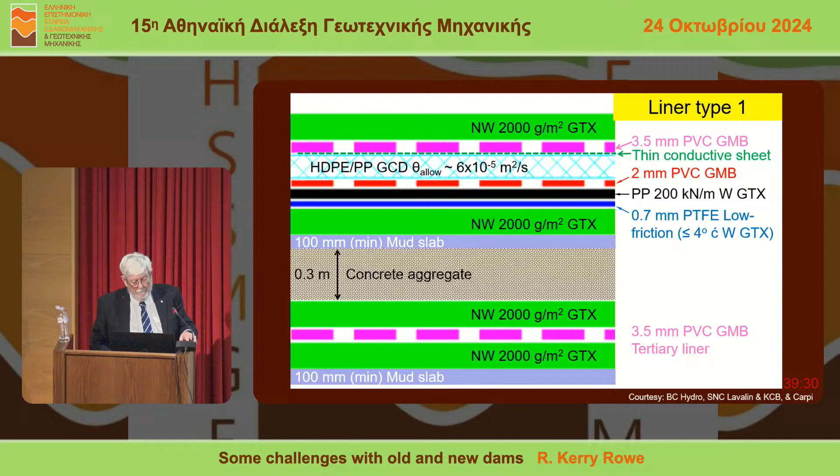And here we see the construction of a liner system that has to withstand 25mm of potential horizontal movement of the underlying bedrock. So here we've got the mud slab, a geotextile, a tertiary geomembrane, another protection geotextile, concrete aggregate, mud slab, geotextile. This is a PTFE, very thin friction resistance layer, so it provides very low friction resistance. A polypropylene reinforcing geotextile, a 2mm PVC geomembrane, a geocomposite drain, a thin conductive sheet, a 3.5mm PVC, and a geotextile protection layer before we get to the sand.

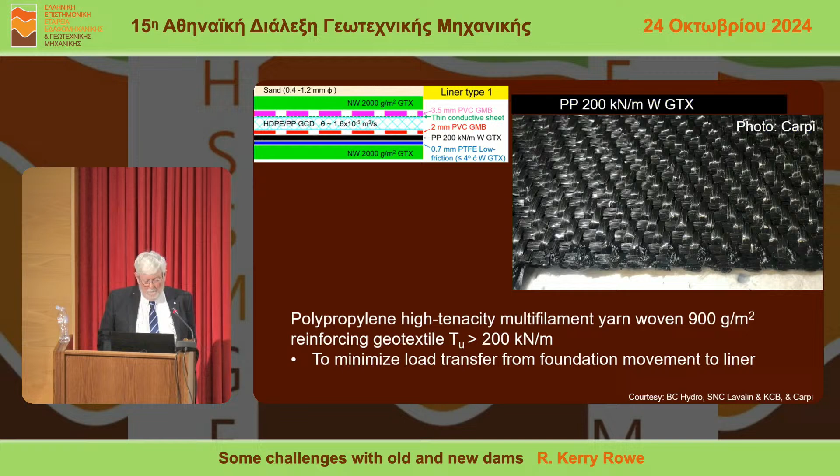So let's look at some of these materials. This is the geotextile, and by testing we demonstrated this particular geotextile, and most do not have this, had 100 years design life at operating temperature. This is the low friction material, the reinforcing geotextile, quite a strong one.

And here is the PVC. Again, work by J.P. Giroud supported a 100-year design life at operating temperature. This is a geocomposite drain.

Products can look identical and have totally different service lives. I'm going to show you results for the component that affects their service life. And the magic number is we'd like to be at about 100.

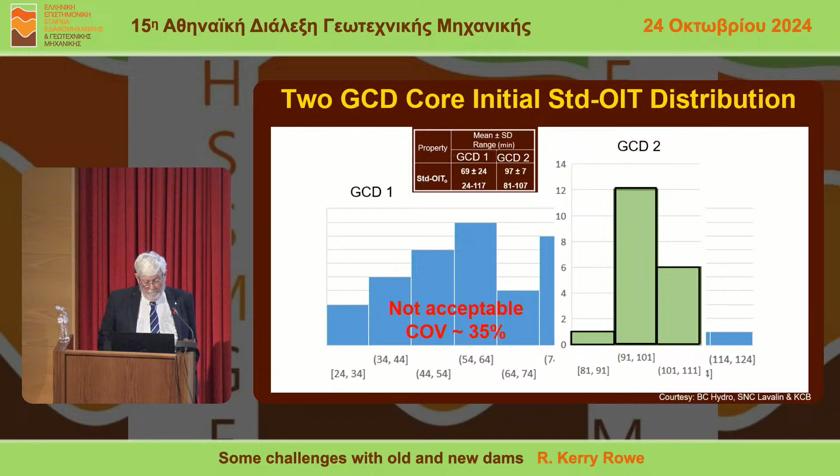Look at this product, totally unacceptable. This one, pretty good, relatively speaking. If you didn't do that type of testing, you'd have no idea, and your material, if you picked number 1, would degrade before your 100-year service life, substantially before. So remember, people do what you inspect, not what you expect.

So we now have quite a complicated liner system that can accommodate, at least in theory, 25mm of horizontal movement. But do we test it? Yes. So here is a test with a 50mm wide crack - we only require 25, but 50.

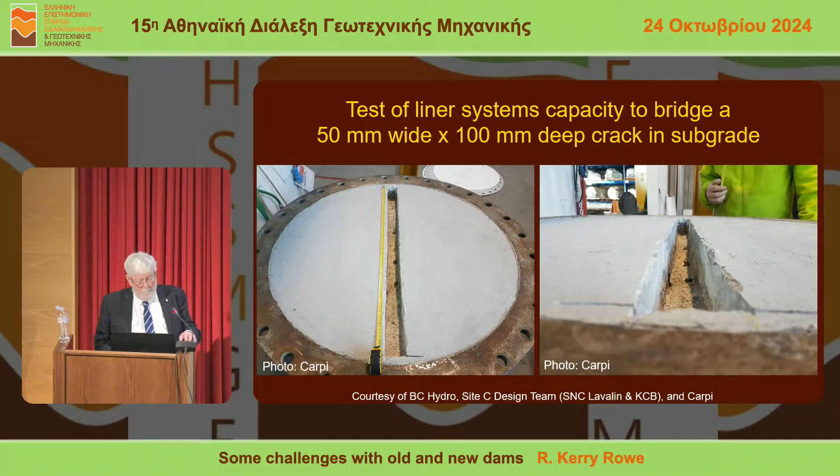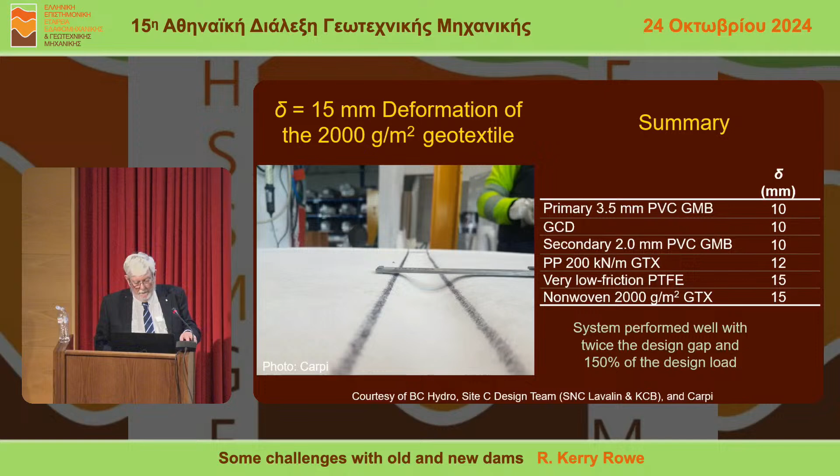100mm deep crack, loaded to 1.5 times its design pressure to 430 kilopascals, and the residual deformation was about 10mm at the top, and the nonwoven geotextile did its work, at about 15 millimetres at the bottom. So it performed well with twice the design gap and 150% of the design load.

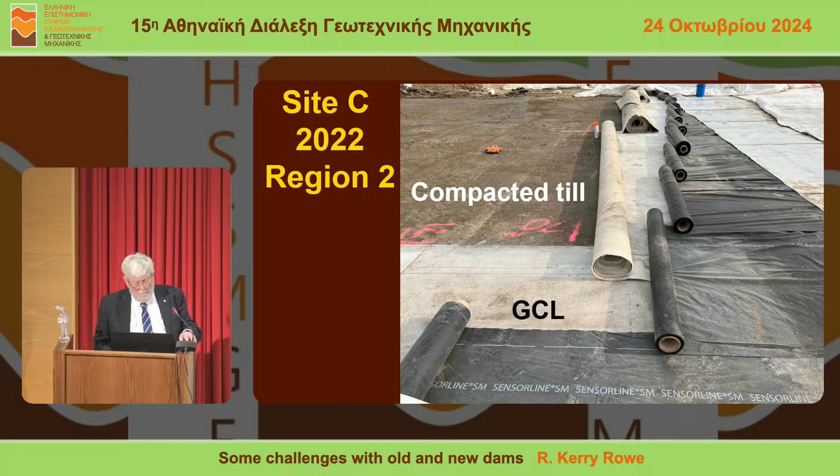So there it is. Here's region 2 being constructed. You see the compacted till, the GCL, the conductive film, the geomembrane, and the geotextile.

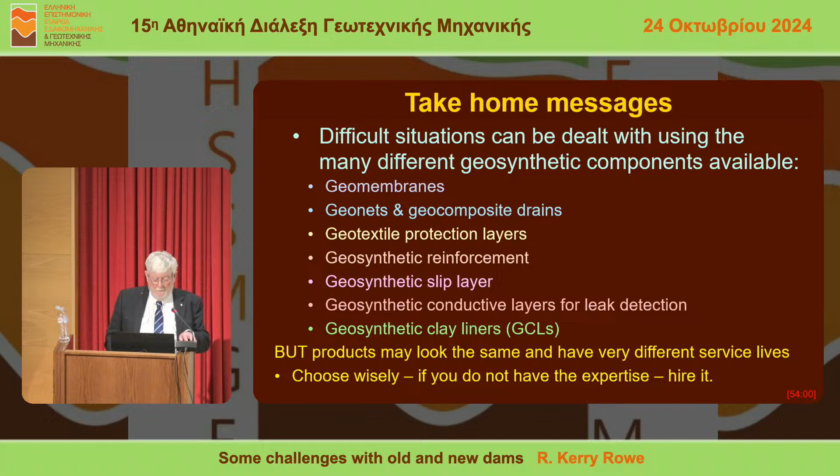So difficult situations can be dealt with using many different geosynthetic components: geomembranes, geonets, geotextiles, reinforcements, slip layers, conductive layers, and GCLs. But I caution you again, products can look the same and actually have very different service lives. Choose wisely. If you don't have the expertise, get it. Remember, people do what you inspect, not what you expect.

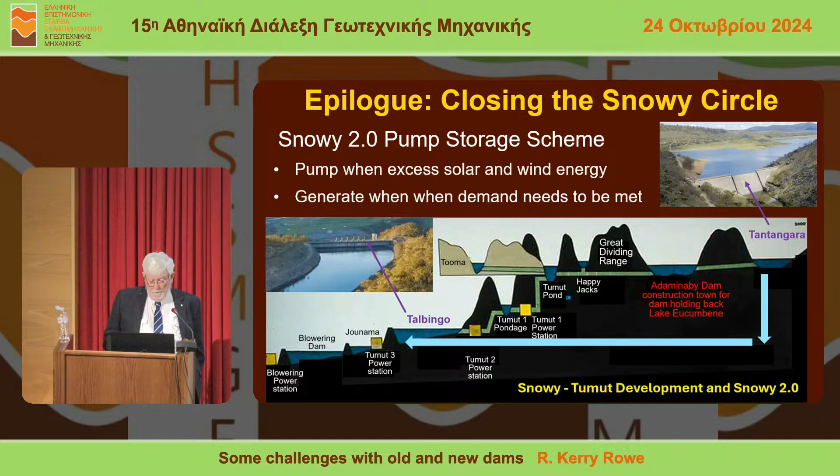So this is bringing me full circle to finish off on Snowy 2.0. It is the next generation of power for Australia, and it's using 2 of the dams from Snowy 1.0, and the idea is when you have excess wind and solar power to use it to pump water from Talbingo Dam up into Tantangara Dam. And then when you need the power, you run it the other way.

It has to be completed before a number of wind projects come online and 5 coal power stations are going to be closed. It's expected to be operational at the end of 2028 and hopefully with power by 2027.

But like many projects involving dams, it's had its problems. It started with 1 tunnelling machine, which was stuck for 19 months in soft rock near Tantangara. They now have 3 tunnel boring machines.

Its original budget was $2 billion. That had risen to 6 by 2017, 12 by 2024, and I predict higher by 2028. But it's still very, very cost effective at 3.4 million euros per megawatt.

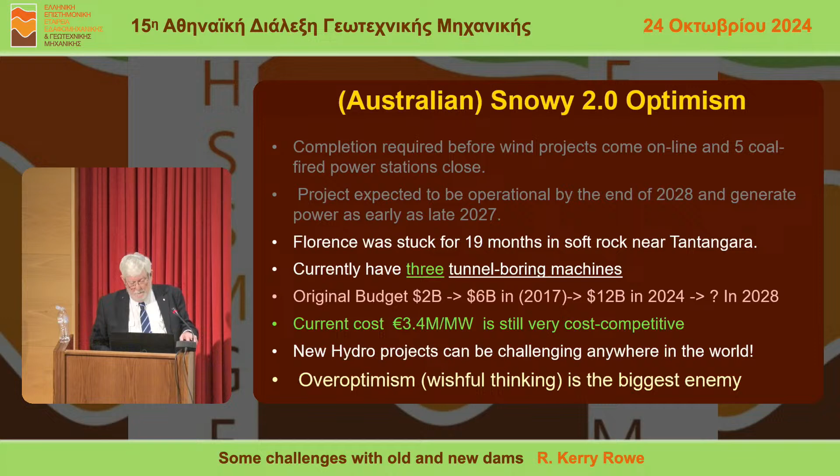So new hydro projects have been challenging anywhere in the world. The most common problem is over-optimism. Wishful thinking can be our biggest enemy. And I thank you for your attention.